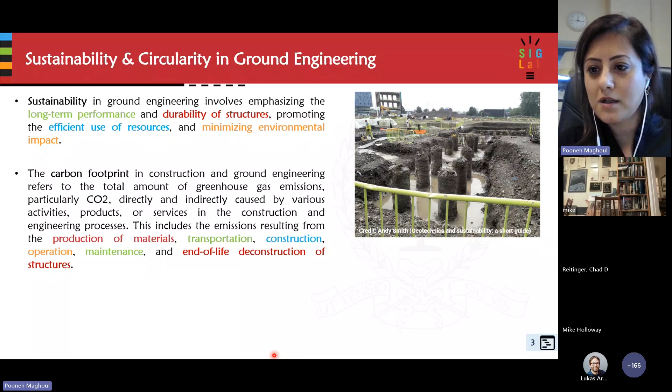The thing is, in geotech we work with soil, we work in underground spaces, and unfortunately at the end of the project, no one sees what we left. In terms of carbon footprints, I have no idea - I couldn't find specific statistics on the carbon footprint in geotechnical projects in groundwork.

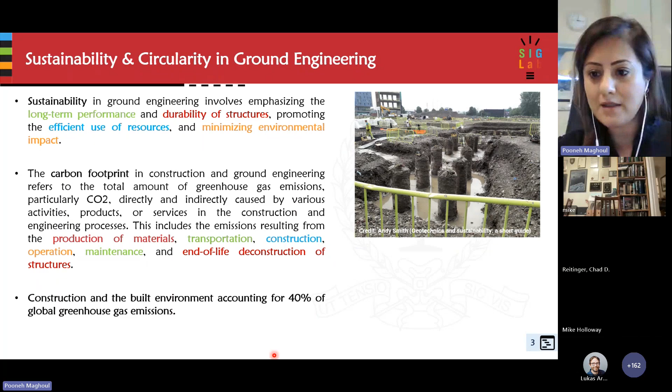For example, when it's related to structural engineering, it's above ground - everyone can see it, so we have a better idea about the carbon footprint of structural elements. But when we deal with ground engineering, groundwork, earthwork, it's a bit difficult to give specific numbers. We know construction and the built environment accounts for about 40% of global greenhouse gas emissions, but I have no idea what this amount would be specifically for earthwork.

If you look into the literature about improving the sustainability of a project, you can see many things - waste management, infrastructure development, rehabilitation. The idea is we want to reuse, we don't want to leave things. For example, if we have an aging structure and want to rehabilitate or destroy it and build a new one - what if we recycle the existing foundations? We call it foundation reuse. All these small elements contribute to the carbon footprint of a project.

Resource recovery, mitigation of natural hazards, frontier exploration and development, energy efficiency - for example, how we can recycle this heat island in urban zones. Everything related to geothermal, shallow geothermal extraction, etc. They all contribute to circularity and sustainability of a project.

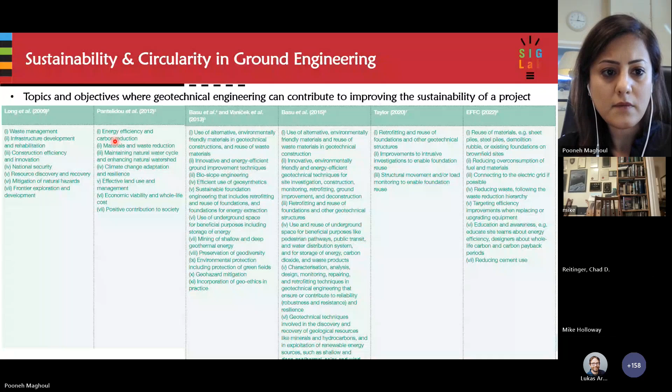I took this from LinkedIn - I saw a very nice post. The person who shared it is not in geotechnical engineering, but in climate finance, climate policy. The message was very clear: the takeaway from COP28 last year, to reach the 1.5 degree target, we need to transform our economy at the scale of the industrial revolution, but at the speed of the digital revolution. To do so, climate technology is key.

Now look back to geotechnical engineering - when we say climate technology, what does it mean? We all live in the big data era, the AI era, but the main question I have - and I use AI a lot too - is that these tools can help us analyze better, understand data better, but it doesn't necessarily give us hard tech, tangible products. We can integrate AI into those things, but when we talk specifically about ground engineering technology, how can we revolutionize the way we practice geotechnical engineering?

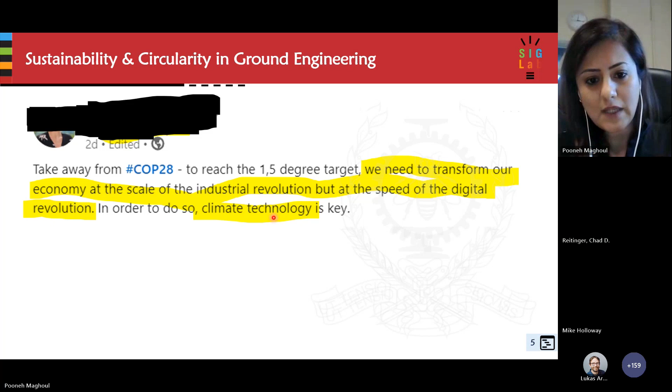The big question is that climate technology in ground engineering - we can develop it. I'm a researcher, I'm a professor, I develop lots of fancy things, we want to explore even the moon in our lab. But how do we do technology transfer and bring this development to a real life project and technology adoption?

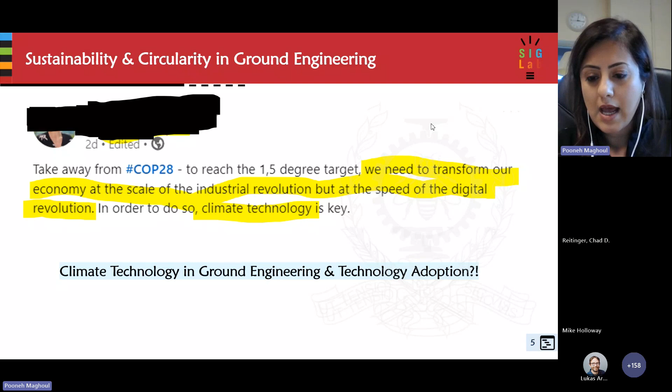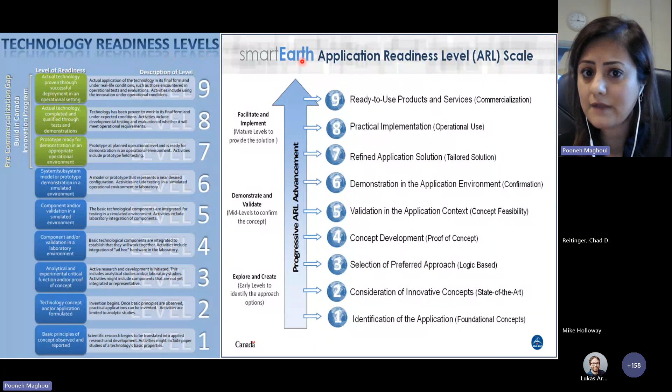There's something we know less about, unfortunately, in geotechnical engineering - this scale, we call it technology readiness level. I don't know how many in this room know about this readiness level - there are so many things, application readiness level, scale, etc. Normally what we do in the lab: literature review, define the methodology, do the scientific approach, develop prototypes, test them with lab scale and physical modeling tests - and we stop somewhere around level 3 or 4.

The technology we all use, like AI, is at level 9. All the instrumentation currently used in practice is also at 9. Now I want to develop something - I'm at a lower level and want to bring my technology to 9 and give it to BGC and BGC's clients to apply in a real life project. There's a lot of development to be done. I'm telling you this because the things you'll see later may seem like science fiction - well, not quite - but we do lots of interesting things.

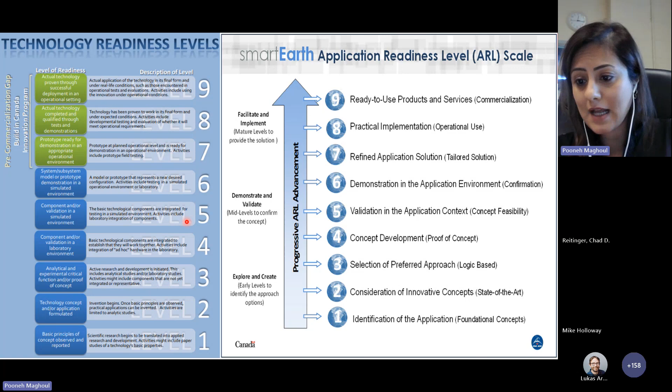The technology readiness level for now is somewhere around 3 or 4. If we want to use it, give it to BGC clients to use, we have to develop it further. We have to test it in the field and make sure all the steps in the application make sense, and that we can make this technology work in a real field.

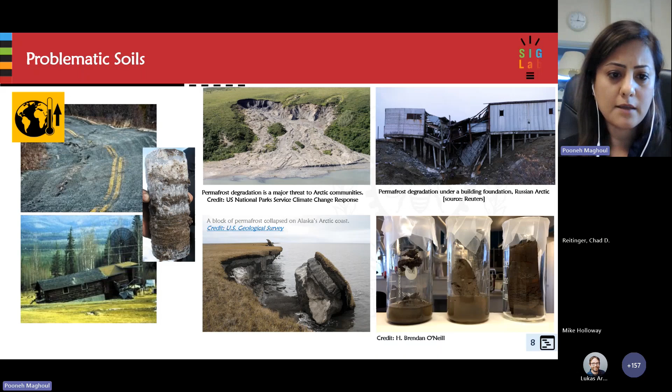The other thing, problematic soil, is tailings. There were a few presentations before me on how we can actually mitigate liquefaction and all these erosion problems.

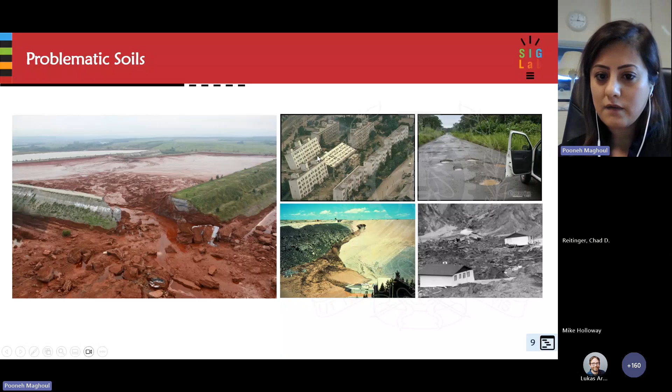If you're in BC, you're mostly okay, but this is the condition of our roads in Canada. How can we actually develop a green technology with minimum carbon footprint and environmental consequences that can stabilize things? That doesn't mean we don't do anything in geotechnical engineering.

We do lots of interesting things. For example, we do mechanical improvement through dynamic compression, preloading. We have all these chemical stabilization methods. But chemical stabilization, forget about it.

Biological stabilization, as you can see, we started working on this 20 to 25 years ago, and now we try to apply it in the field. Behind this biological stabilization is at least 20 years of hard work and lab development, and now we are at the stage of using this technology in real life projects.

What we tried to do here is that even with biopolymers and nanomaterials, we are still at the lab scale. We are not in the field as far as I know, and we are working on these things.

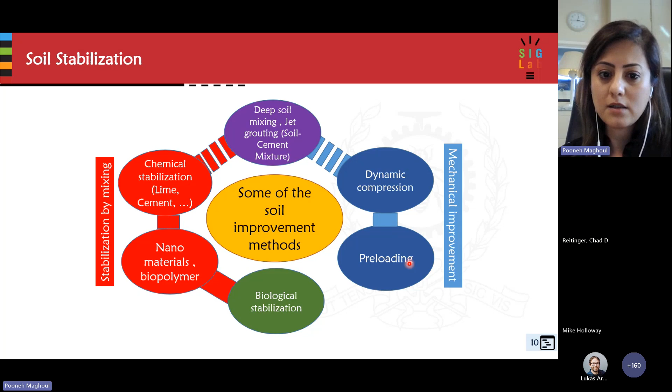In terms of chemical stabilization, the technology readiness level is very high, it's a 9. It is, I think, as much used as mechanical improvement, dynamic loading, preloading, etc. But again, how can we develop new methods, sustainable technology, green cements for stabilization of problematic soils?

Cementing of soil particles to boost their strength and create a solid structure is one potential solution. Cementation, but using green methods, nature-based methods. We know that cement production involves a process emitting significant CO2 and requiring high temperatures. We want to avoid it.

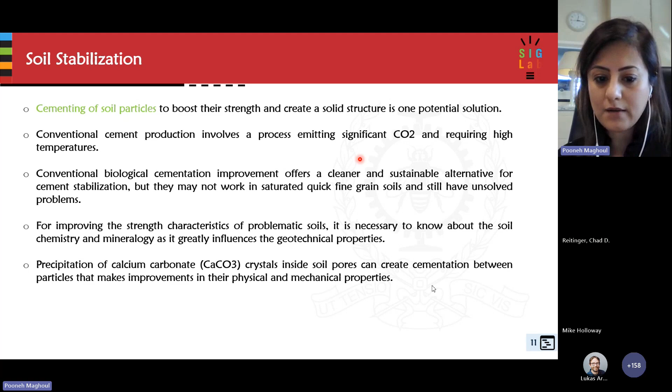What we try to do at the end is find a kind of recipe or formula that can create precipitation of calcium carbonate crystals inside soil pores, to make this cementation between particles, achieve ground improvement, and improve the physical and mechanical properties of soil.

What we have done with BGC is try to find all these wastes, industrial waste, agricultural waste, mine waste, and also use microbes, similar to what we do with MICP, microbially induced calcite precipitation, bringing new ideas into the recipes and formulas.

For MICP, for 20 years almost everyone has been working on the application in granular soils. Why? Because we cannot use MICP in fine grained soils, in clay soils. From the beginning we have this barrier, we develop a technology but cannot use it in all types of soils.

But what if we use additives that make it work? Then MICP, we can use it even for clay soils. That's why we tried to mix MICP with nanoparticles, with nanotechnology.

For example, SiO2, silicon dioxide, silica, or even calcium carbonate. Using onion peels, brewery wastes, eggshells, or even zeolite, we develop MICP with different additives.

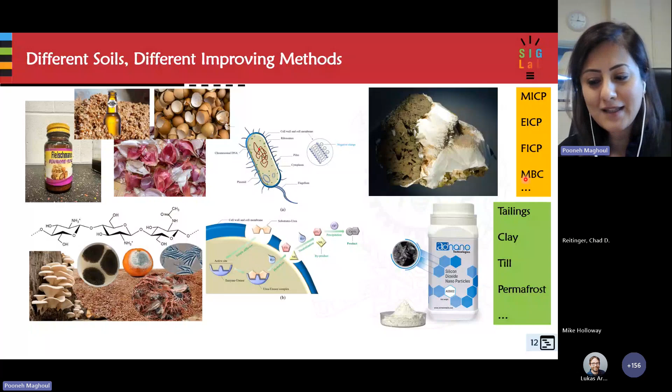Then what we do normally, again, technology readiness level 3, 4. Here I'm not talking about field test because we still need to develop the recipes and work on different aspects of it and see if it works well in the lab, then do physical test and then go to the field. What we do here, I just gave you one example, MICP enhanced with nanoparticles.

We tested on clay soils. This is our methodology. We did some macro scale tests, element tests, uniaxial test, triaxial test, because we are in cold regions. Then we actually tested under freeze-thaw cycles too. And then larger scale tests, I mean shake table tests, centrifuge test, physical modeling. We also performed microscale tests because we want to see at the microstructure what is going on.

Then we did SEM, XRD, and also chemical analysis to make sure that the chemical things that we see within the pores are exactly the calcite crystals that we were looking for.

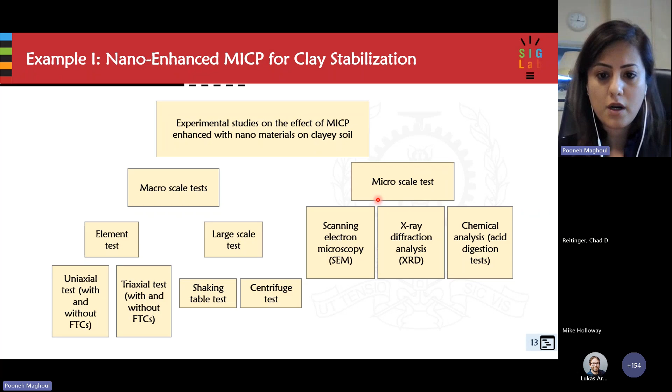The example here, example one, is related to nano-enhanced MICP for clay stabilization. We did mixing in the lab. We prepared our soil samples. We put them in a mold. This is the picture of one of our samples.

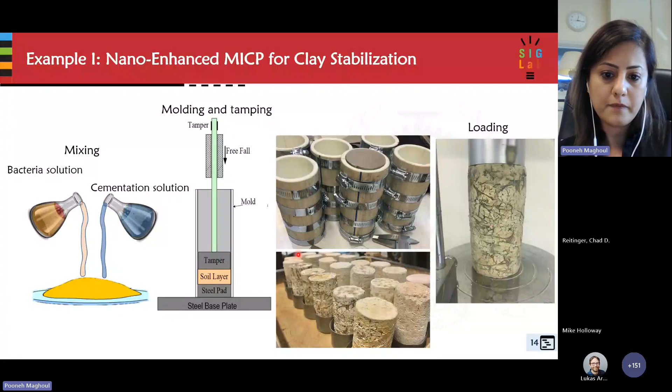We put it here, you can see the image of the uniaxial test, and we tested it with different percentages of nanoparticles. The sample is fully saturated. One of the biggest issues with MICP is that when the saturation degree is really high, it becomes less efficient. But by using different additives, we could manage this, and we saw that when we add these additives to the MICP process, the peak strength increased significantly.

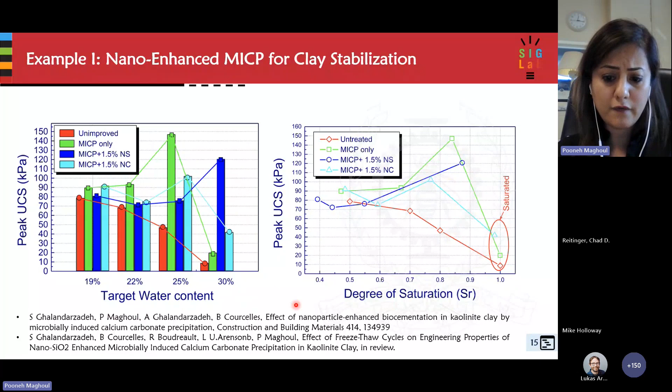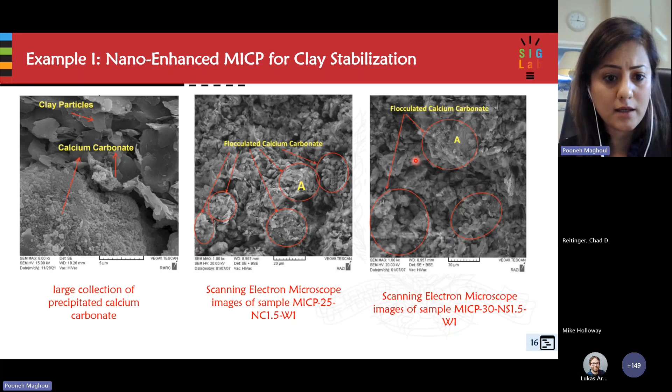We published our work. We also did freeze-thaw cycles on the samples. Here, what you can see is at the micro scale, this calcium carbonate created within clay minerals. It was actually a big deal to be able to stabilize clay. I told you MICP has been used in coarse grain soils, but for clay, applications were very limited. By adding those additives, including nanoparticles, we could make it work.

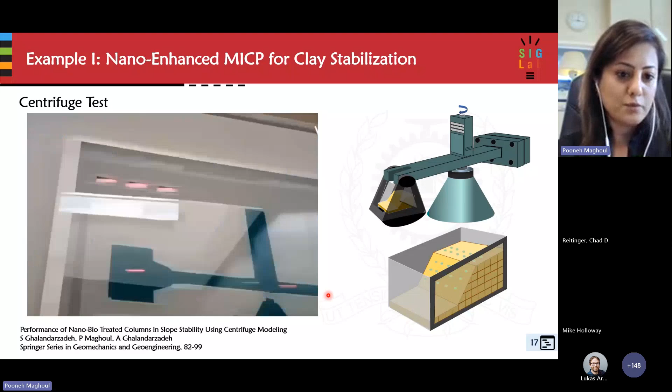We also did a centrifuge test. As you can see here, this is our model. Through deep mixing, we injected these solutions into the soil and then put it in a centrifuge test. The sample was about 50 centimeters. Through the centrifuge, we could have an idea about the stability of an 11-meter slope.

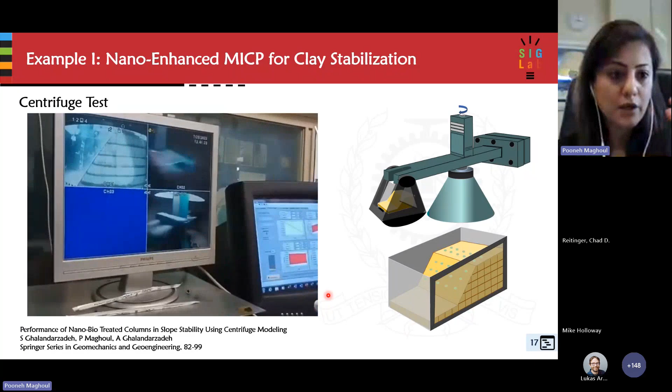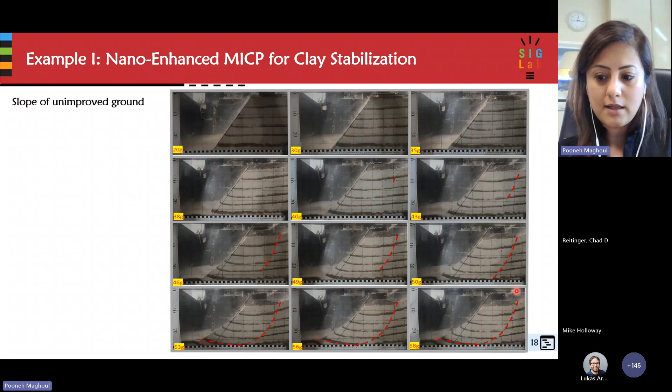This is the results. What you can see here is for untreated ground, we just wanted to have a benchmark to compare the treated soil. By increasing G, you can see the instability issues that appear. But when we treated the soil, we injected it with deep mixing, you can see that even at 77 G, which is equivalent to about a 12-meter slope, there was no change. It works quite well, and we're very happy about these results.

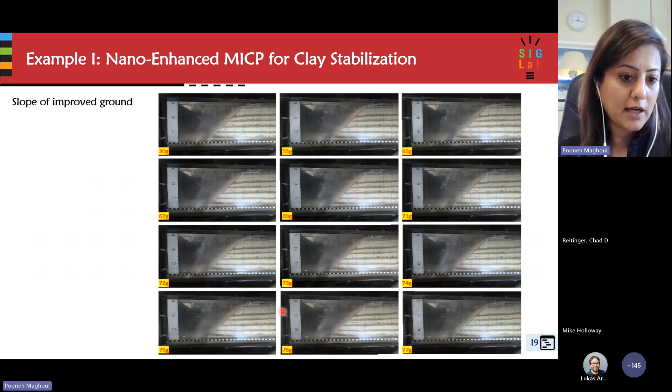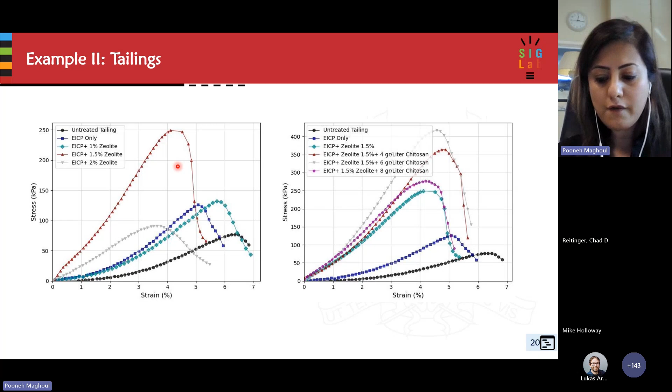We also tested another formula. It is based on EICP mixed with zeolite. We add other additives to it too, but we tested it on tailings. As you can see, that black line is for untreated tailings, and you can see how using the EICP method plus other additives significantly increased the strength of the tailings materials, the tailing soils.

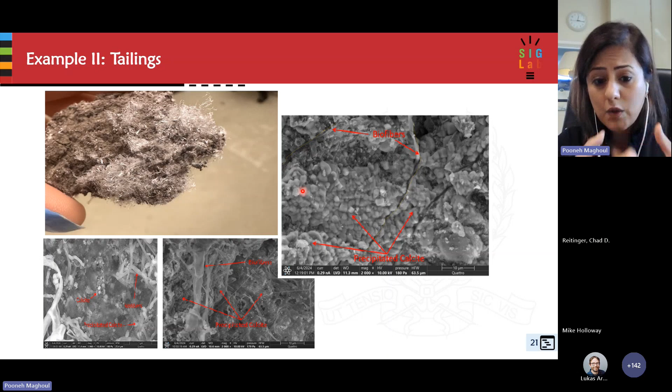This is actually the product, what you can see, the biofibers that we created in the lab. It was a very, very interesting sample. I think after about 28 days you can really see the creation of these biofibers within the soil. It's a dynamic process, they keep growing if the conditions are still available. Then it just bonds these particles together and significantly increases the strength of the soil.

Exactly the same thing that we see these days in northern regions. We developed our solutions and tested different things. For sure, the first round it didn't work, but we tried to develop again new formulas, new recipes.

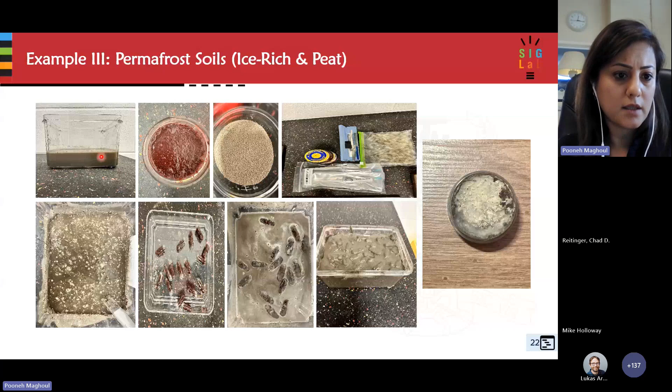If I want to make some general comments about this development, we can use nature-based solutions, circularity concepts in ground improvement. I should emphasize that for now the technology readiness level is 3-4. We are not more than that. We are not ready yet for field trial tests, but within 1 or 2 years, for sure, we will be there.

One of the things we have to think about is how we can scale up to engineering scale. For now, again, we are in the lab doing centrifuge tests, but now imagine we want to bring our solutions to an engineering project. It can be done, but we have to think about the way we want to actually use it. Is it sustainable or not?

We test everything, all the steps, all the ammonia, everything released from these processes, we try to test it. And if we feel there is something that can be dangerous environmentally, we try to mitigate it. But what I want to say is that sustainability is not all about materials and residuals, it's also about the cost of the project. If we have the best solution, but it's costly, no one will use it.

Then how can we actually make it possible? We are working on it. I think it is expensive, especially if today I compare the cost of the project with Portland cement, but with all those carbon taxes that we have, it will change.